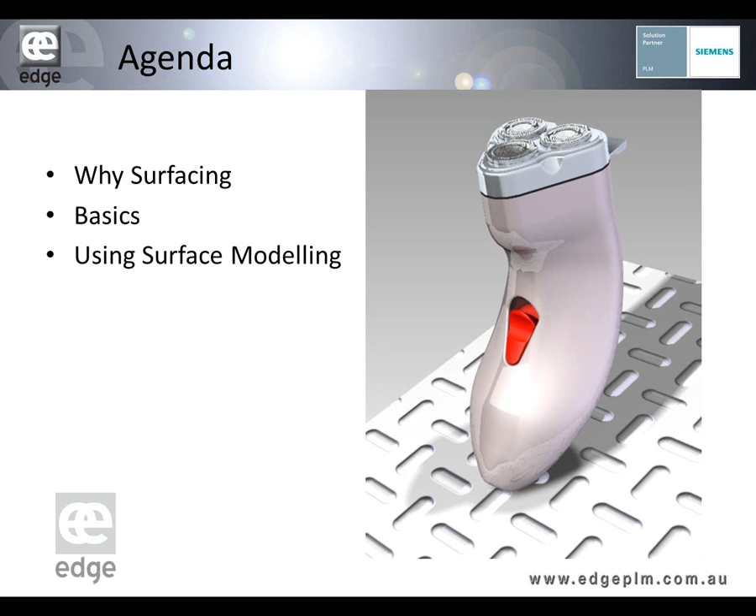Okay, just to divide it all up, it should be fairly clear cut, but it's not necessarily all the time. We're all familiar with solid models, and here function's the primary concern, and aesthetics are an afterthought, if at all. When we're talking about surfaced components, again, I refer to the shaver body here, aesthetics is the number one concern. How it looks, how it feels, all of those sorts of things are the primary concern, and function secondary.

Now we use surfaces again where function's primary, but using the surface technology happens to be the easiest way to go about it. And the example I've got here is like a concrete base, drainage base, or something like that. It's a series of planes, tilted planes, and the easiest way to produce those and manage them is to use surfaces. And we'll look at both of these techniques as we go through.

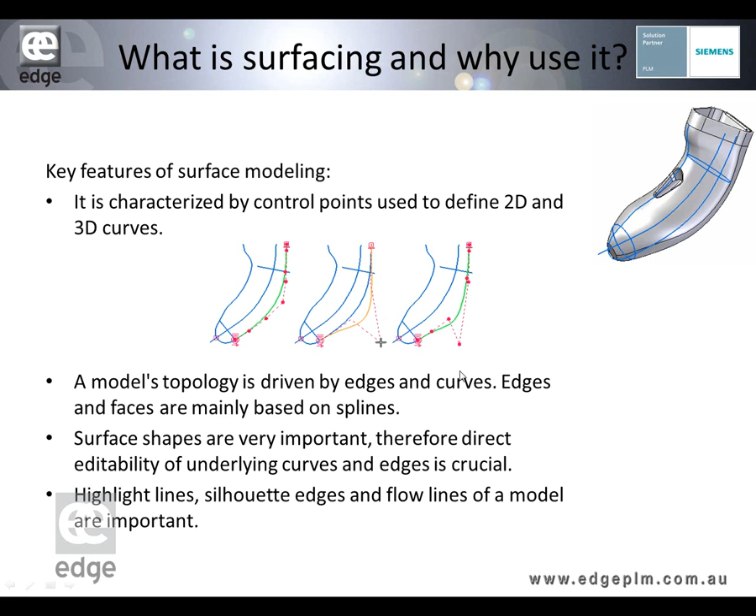When we're surfacing, we talk in terms of highlight lines and silhouettes and edges and flow lines, and these are what are important to make up the shape of the model. And that's what we use to make a shape. It sounds quite complex. It isn't. It's fairly straightforward. So we've talked a lot about curves. What are curves? So we've got the curves that we're used to, 2D lines, arcs, conics, etc. So straight lines, circles, arcs, ellipses, and so on. These are curves.

We also have edges of three-dimensional shapes, so cubes, spheres, cylinders, tori, which is the plural of torus, and cones. All of these things have edges, or silhouette edges, which we can use to drive models. The spline area we mentioned a little earlier is where we have continuously changing curves, and we have a number of tools to create and edit those.

And there's two types. We're looking at an example here of a 2D constructed spline, and we can have derived curves, which are derived from edges. So we might have a number of splines and edges. We also have 3D derived spline curves. An example here might be in this instance where I've got a curve that's been created between these two lines on the edge of a block. That's a 3D curve in space. There's been some points positioned on that, and then another curve generated through one of those points into the edges here, with controls on their tangencies at the ends. And that's a 3D derived spline curve.

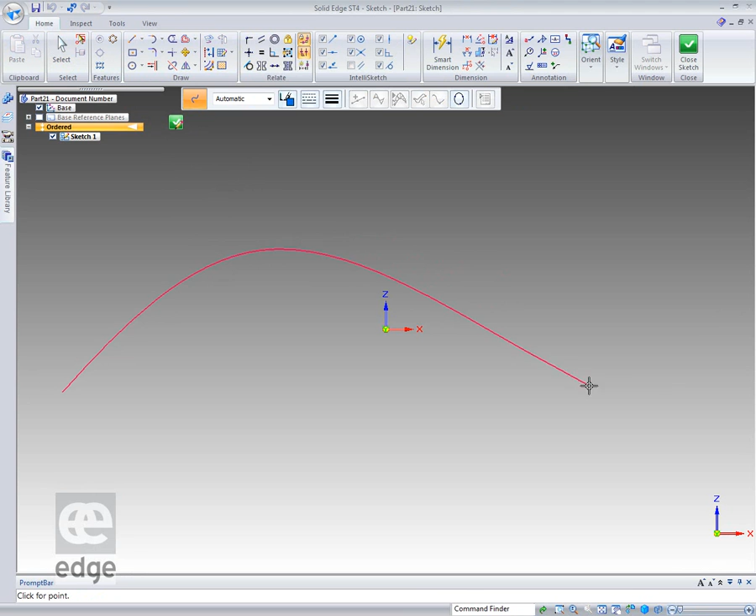Let's just look very briefly at how to create some of these, especially the 2D curves. So starting off, I'm going to use ordered for this, and I'll be using both ordered and synchronous today. The spline curve command is in behind the line command, and we simply click, click, click, click, click to place points. And you'll see the crosses that lie on the curve are the points.

If I reselect that curve, we will see a control polygon around the curve. And here are the points that we put in to begin with. They're the edit points. In between, usually between each edit point, the start point and the next edit point, we see 2 points on the control polygon. Now if we look at our command bar, we've got a number of things that we can use to edit this. To begin with, we've got a thing called local edit.

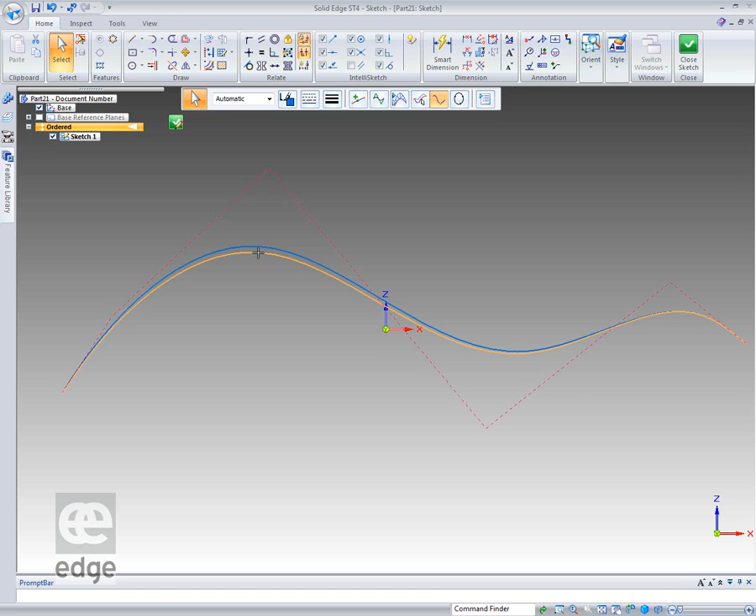Now what that does is if I change the position of, let's say, this control point, it affects the curve mainly locally, just around that edit point. It does tend to blend through the other edit points. But if I go to shape edit, the blending effect is more severe. It tries to keep the overall shape of the curve as I make the edit, changing the polygon control point.

Now the purpose of these polygon control points is that we can control the rate of change of the curve, if you like. For instance, I'm going to put a horizontal vertical constraint between that control point and the end point of the curve, so that the curve vector is vertical at the start point and then blends off into the rest of the curve. I might then want to give that more strength, raise it up, and then I might want this one to be flat, so I could have this effect.

Let's change that to local edit. See the effect there. I want that to be flat, so I'll put another horizontal vertical constraint from that control point to that control point. Now as I make changes in here, say to the edit point here, that condition's going to remain.

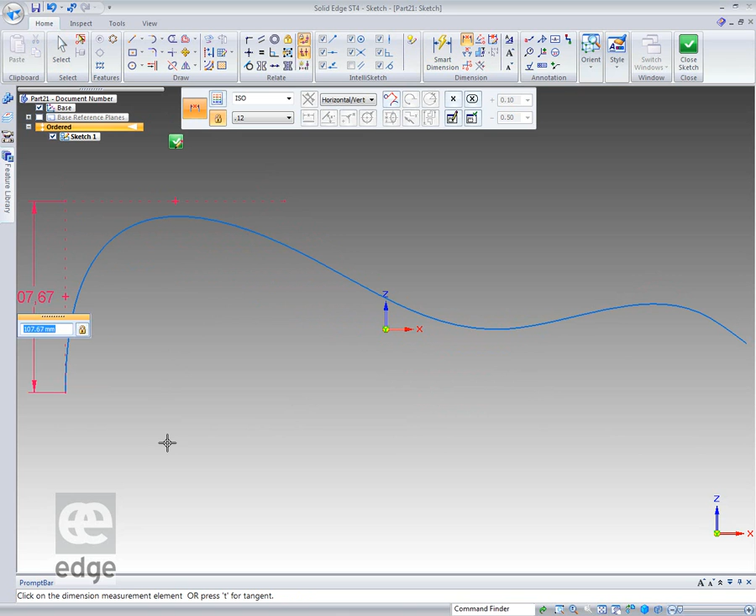I can place dimensions to these, so I could put a dimension from here to control that dimensionally. Likewise I could control the edit point dimensionally as well, from the edit point there to that base point there, in X and Y and so on. So you've got complete control over how these curves are created and edited.

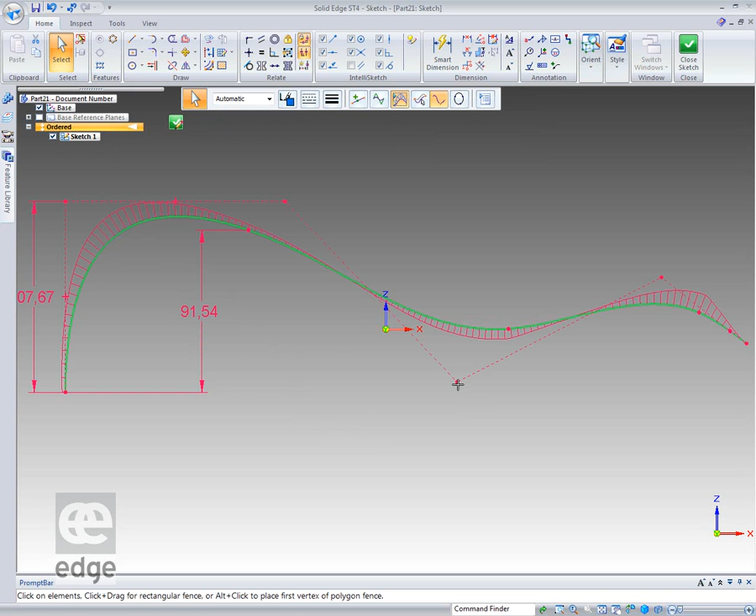A couple of other editing tools while we're here. We've got a thing called the curvature comb. The height of this comb shows the effect of change. So as I put more change in, we'll do a local edit here. We'll see that control curve get bigger. I need to get rid of these dimensions to give me more control.

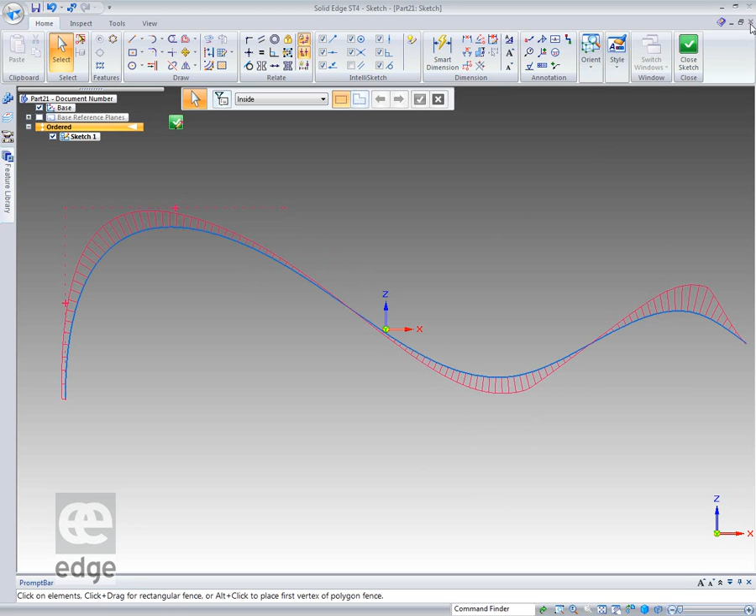So as I change this, you'll see that comb grow. And we also see inflection points as well. At the point where the curvature comb crosses over, we've got zero curvature at that point, but perfect blends through those. Okay. Just to give you a brief idea on how splines work.

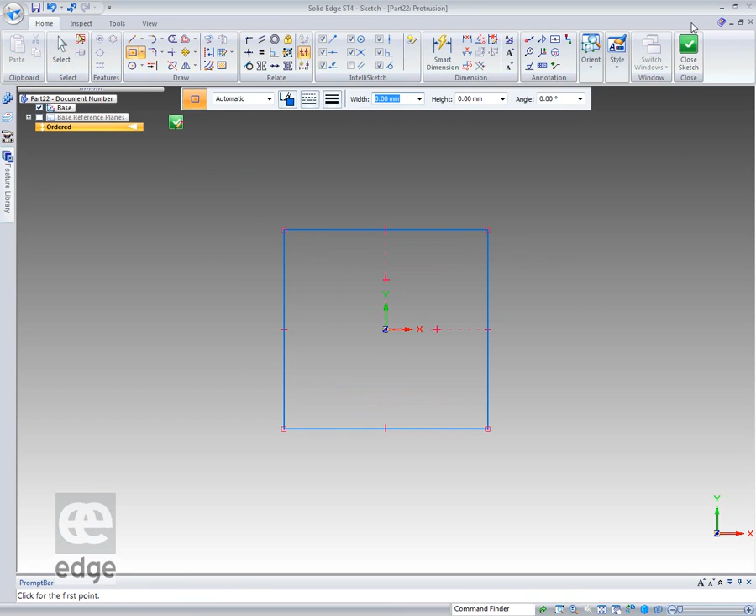I was talking before about the derived three-dimensional curves, and I'll show you one of those very briefly. So we're just going to create a rectangle here. Let's make some sort of shape. Okay, so I'm now going to use a key point curve from my surfacing set.

I'm going to say I want to go from the end of there to somewhere straight above the center there, right about there, to the end of here, to that vertex. And I want to edit the end points, so I want to change the end conditions, and the end condition I want for the start end is tangent, and tangent for that one as well.

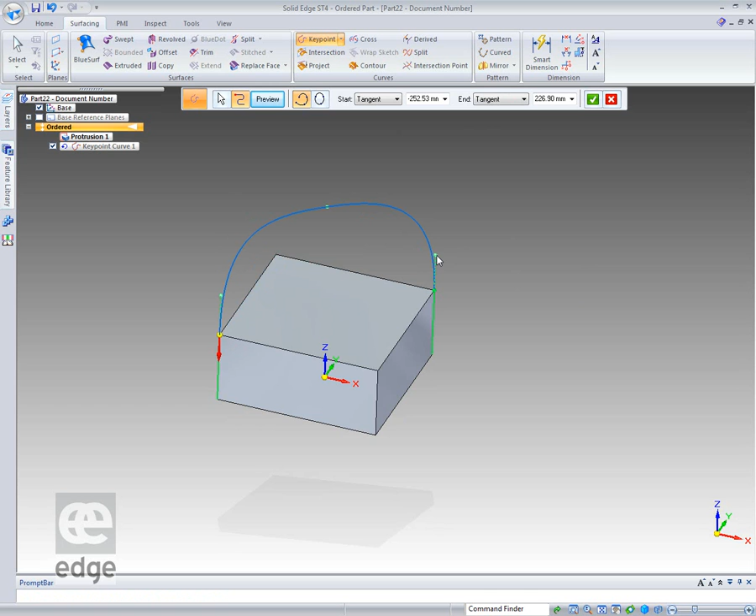We notice that the tangency here is reversed, facing this way, so I just pull on the tangency dot, and you can see the length of the tangency, say 252 roughly, and make the other end roughly 250 as well. So what we're doing is controlling that tangency through there. So that's a three-dimensional derived curve.

We can finish that. That was a point in space I used up here. We can dynamically edit that. I can pick up that point and move it. That point might be defined by something else.

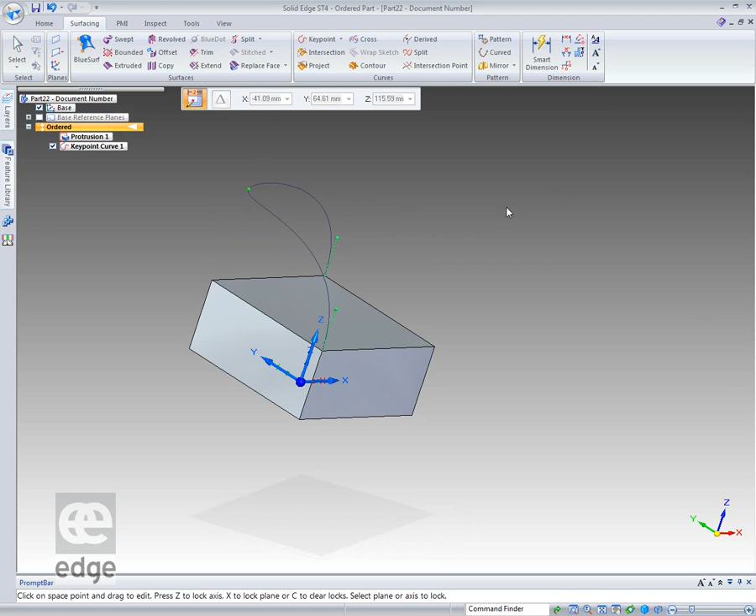I could put that point on here and so on, but that could be a point defined on a plane in space. So you can see how we've got that complex curve there. That's a derived spline. We use a function called key point curve to generate that. There's a number of other curve functions here that I'm not going to go into today, but are covered in the help and in the full training material.

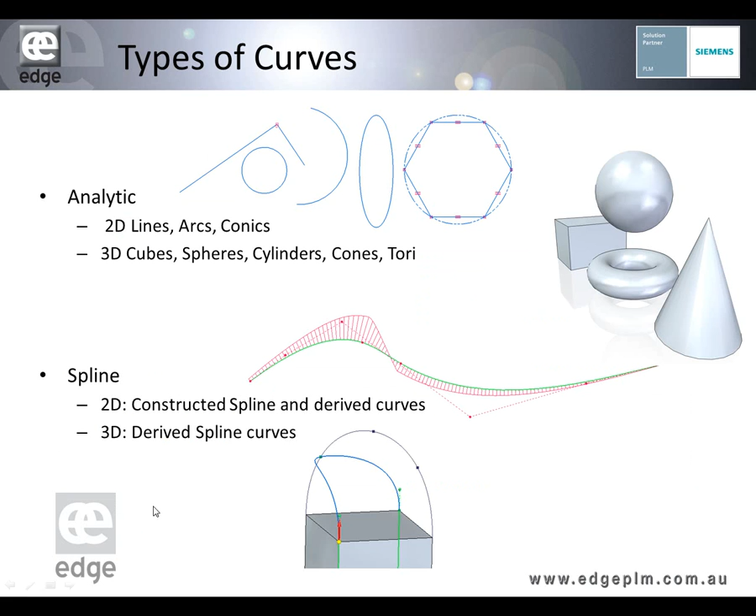Okay, types of surfaces. We've talked about curves. The curves are used to create surfaces. We've got bounded surfaces, and bounded surfaces are planes that are created between curves. They can be curved, of course, because they can be tangent to adjacent faces. We've got extruded. Here's just a sketch. We've extruded that downwards to create a surface. And we've got, finally, BlueSurf, which I'll use a bit later on. But a BlueSurf is a complex surface that's highly editable.

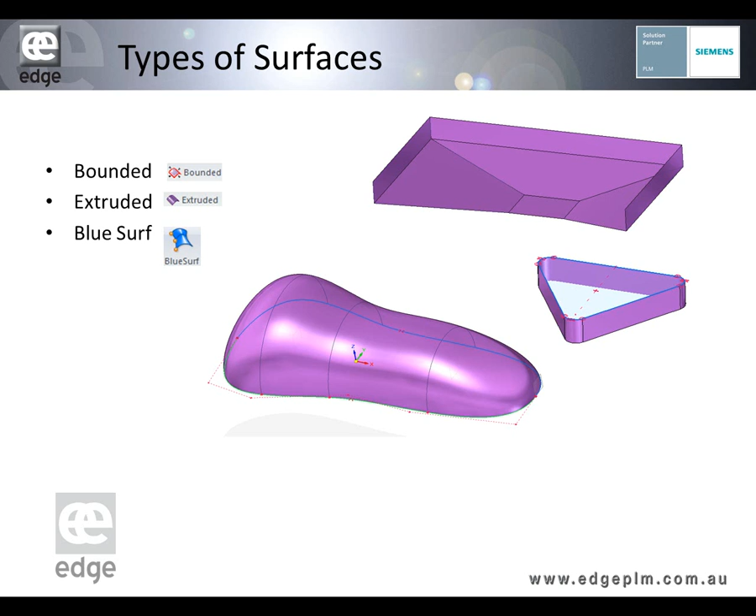There's two functions that are unique in Solid Edge surfacing. It's the BlueSurf and the BlueDot. These allow history-free flexible editing of sets of curves, families of curves that are joined together, and the surfaces resulting from those. And we'll see that in a practical example shortly. So it's probably now time to get onto an exercise.

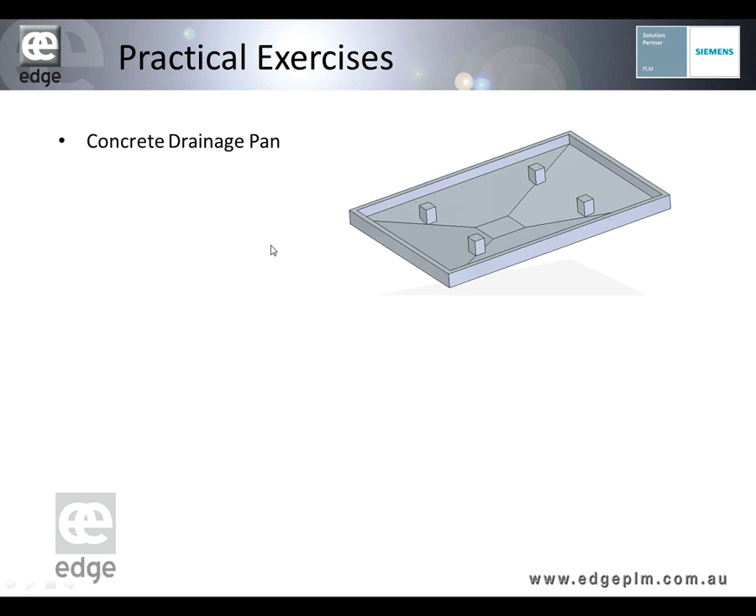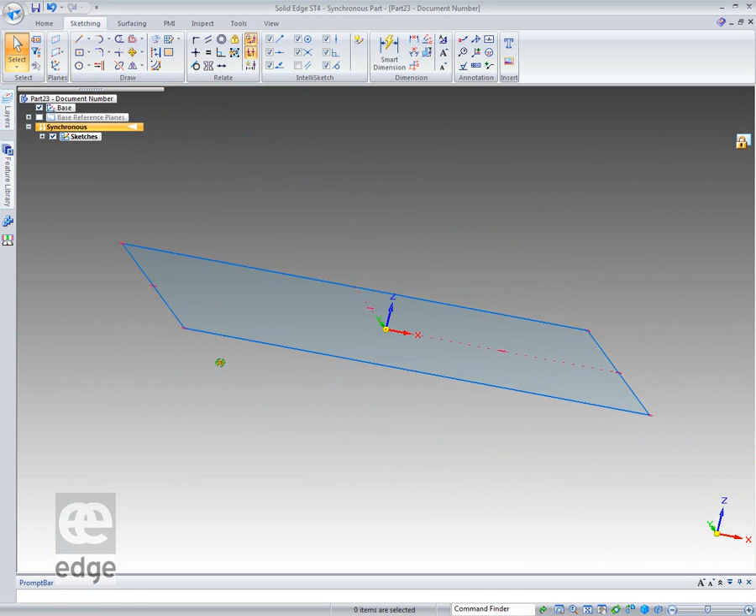So let's go back to Solid Edge and take a look. The first thing I'm going to do is I'm going to model this concrete base. I'm going to do this in synchronous with surfaces. So here we go. First thing's just to draw on a plane, select a plane, and draw a rectangle. I'm not particularly worried about sizes here. The exercise is not one about drawing, it's about surfacing.

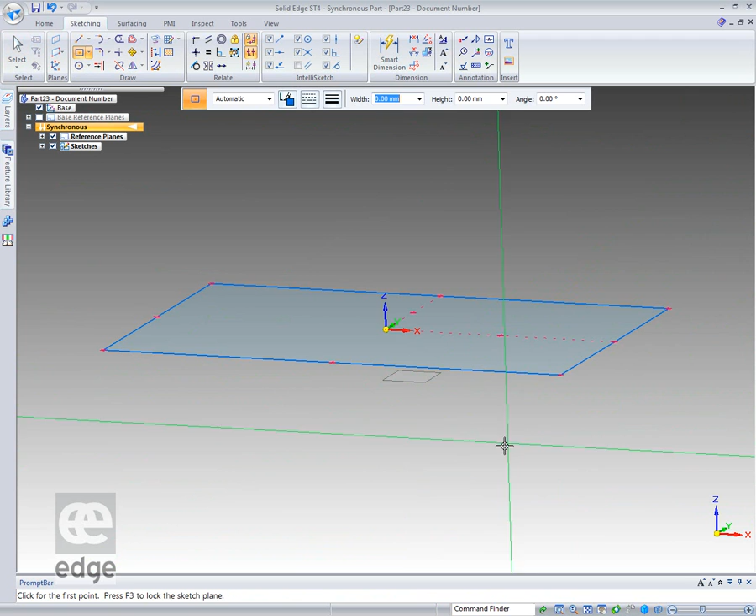I'm going to create a plane on there, and I want that plane to be, use the steering wheel to move that down 20-30 millimeters below. Okay, so I want to draw a rectangle on that plane. So I need to unlock from where I am, go onto the plane. I'll just use the F3 function to lock onto that plane. I can use the sketch view or Control H to get onto the plane, and I'm simply going to draw another rectangle in here. Okay, I'm starting to build up a bit of a shape. It might become apparent to you shortly.

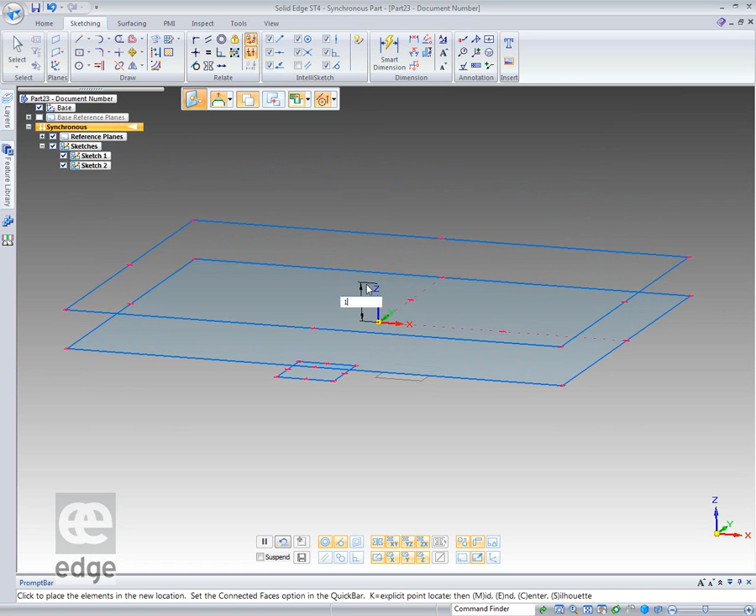Now I want to make a copy of this outside sketch for the top edge of the tray-like structure I'm generating. So wait for my dots, pick up my sketch. I'm going to move that sketch up, make a copy of it, of course, make it up say 15 millimeters. Okay, so I've got my sketch in place. I'm now going to use my key point curve.

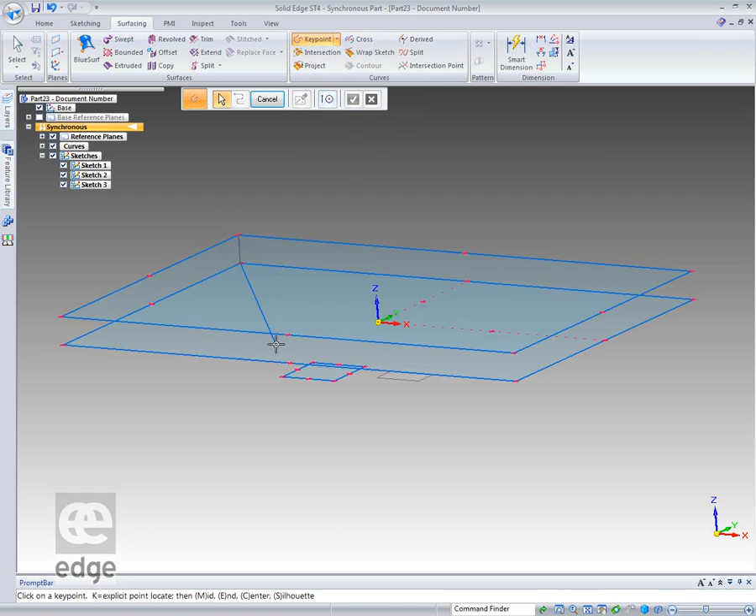Now if I draw a key point curve between 2 points, it will create a straight line. It's in 3D, so I'm taking from that point to that end point, right click to create the curve, right click to start a new curve from that point down to that point there, right click to create the curve, and so on. So pretty simple. Join the dots, just wait for the end point to come up on each one. End point there, take that end point to that end point, and I'm just right clicking instead of clicking the green tick. I want the end point there. Just escape. Went back too far.

Do what I say. Don't do what I do. Isn't that how that works?

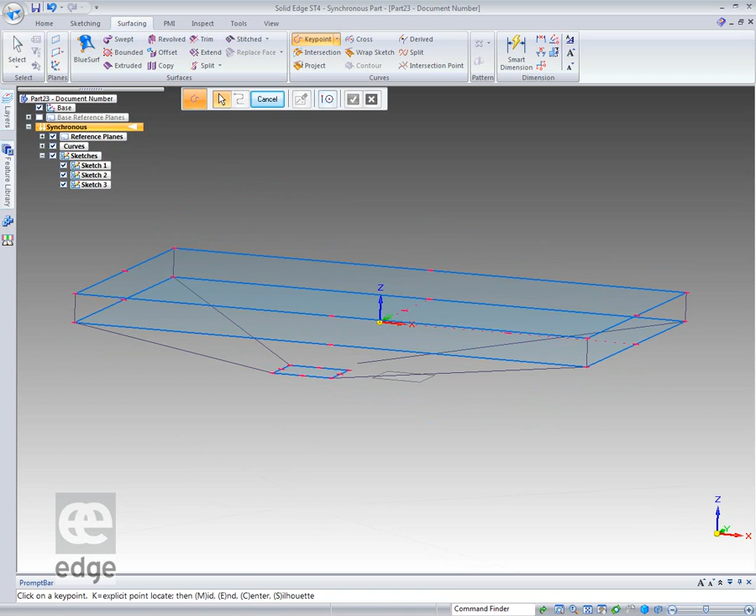And one more. Okay, so we've got a little wireframe in there, and I got that one wrong, didn't I? So just replace that one. Just have a quick check of your object as you create it to make sure you've created it correctly. Not try to rush like I do. Okay, there we go. So I've got a little wireframe of the shape that I want to produce. So this is pretty straightforward.

I'm just going to now use the bounded surfaces in here and pick the edges and tick it off. I missed an edge in here, that edge, so I've got a closed loop. Preview, finish. So it's just a plain face that I've created in there. So same thing again, just go around the edges.

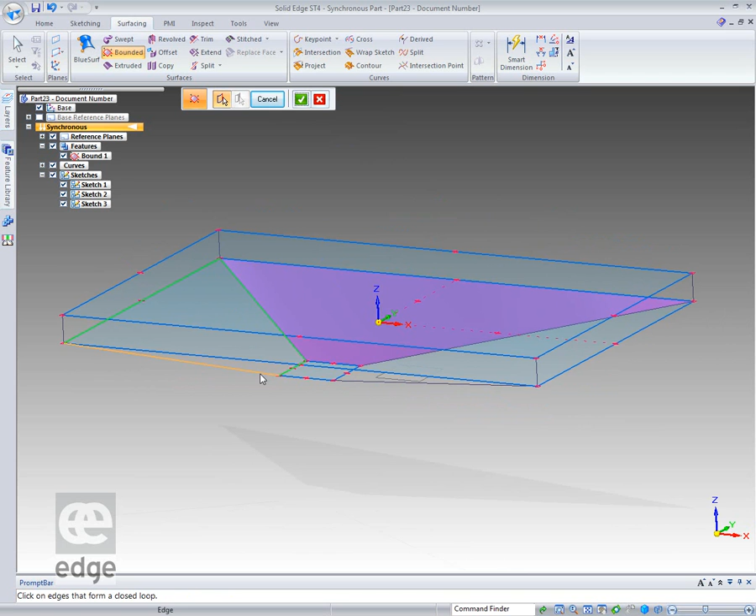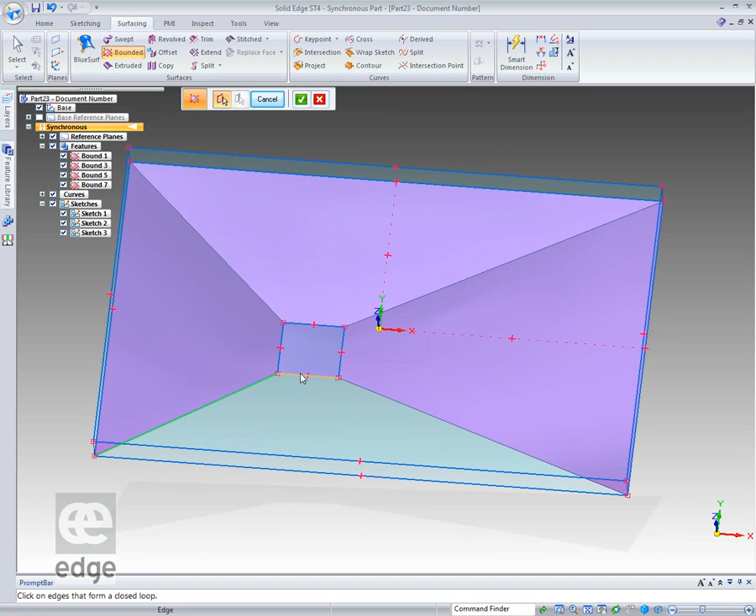It's not rocket science, let me tell you. It may seem a little laborious, it's really not. Putting the one on the bottom there, I can right click instead of green. Right click again, pick up this one. So it's just a matter of picking the edges there. Right click, and now we're ready to do these bits around the edge here.

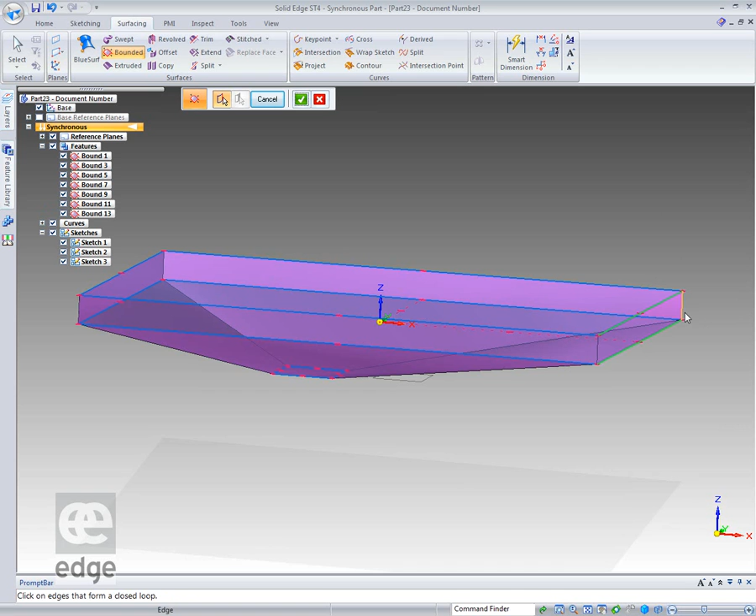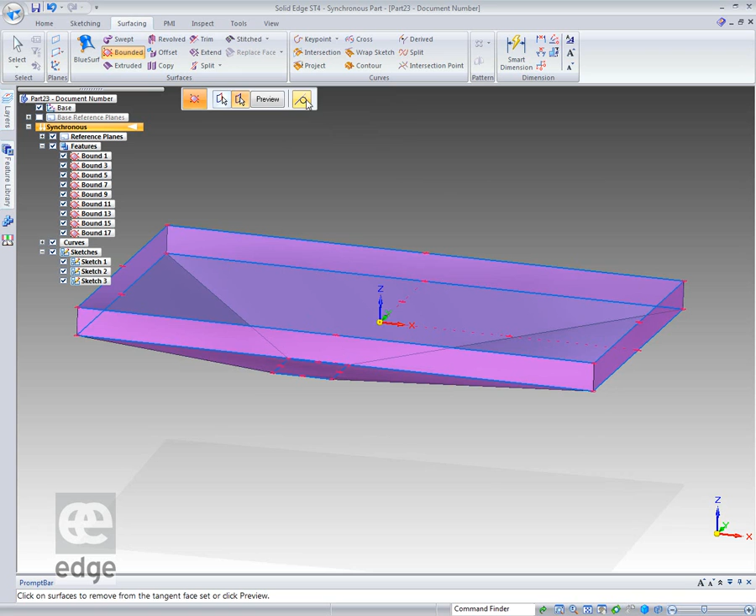And one more. What I'm doing here is actually producing a set of boundaries, if you like, that will define how the solid model ultimately will go together. Now the thing we need to keep in mind while we're modeling with surfaces in Solid Edge is it does use the Parasolid surface kernel to build these, so that we know that the surfaces that we're going to create are manifold. So when I click edges that are on top of the edges, they will in fact join and they will make a solid. So all I need to do now is stitch all that together.

So I use my stitch command here, which says I'm just going to stitch the surfaces together, just accept the defaults and finish. Now I've got this stitch here, and seeing I'm synchronous, all I have to do is attach that model, and you want to add them together. And what that's done is created a solid model. Well, that's fine. The stuff that I don't need here, just turn off those bits and pieces.

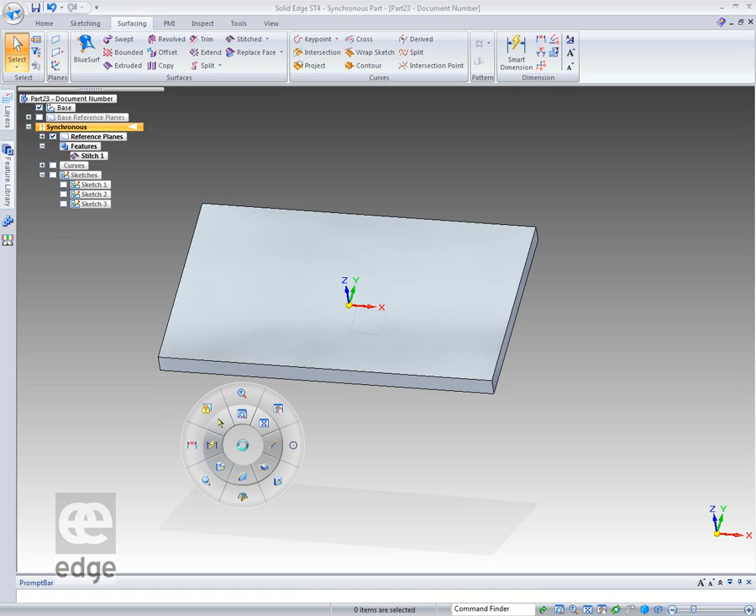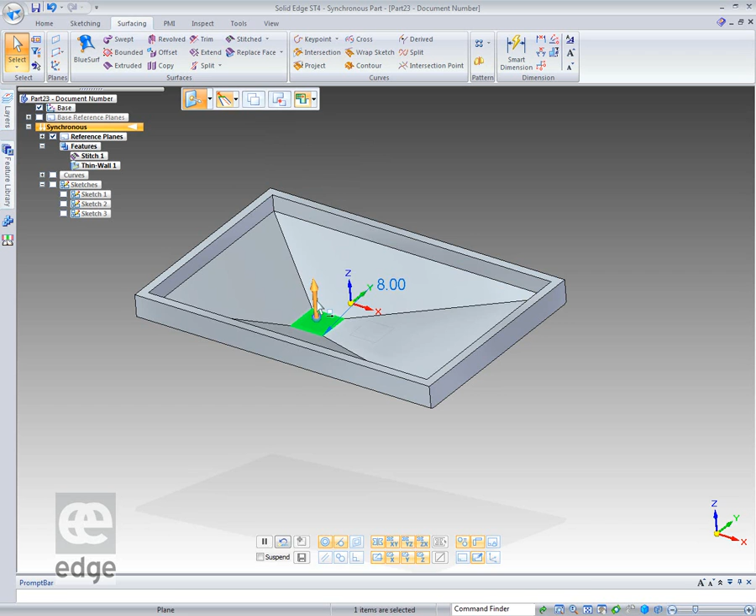Now what we're going to do is we're going to use the thin wall command, 8mm, but I want to come outwards, so I just click on the arrow to go the other way, and I'm going to remove that face. There we go. So there's my piece of concrete. And because it's synchronous, I can modify it. Because it's a thin wall, as I bring that up, I want to tip the edges. So let's drive that up there somewhere, put a dimension on it to drive it, whatever we need to do.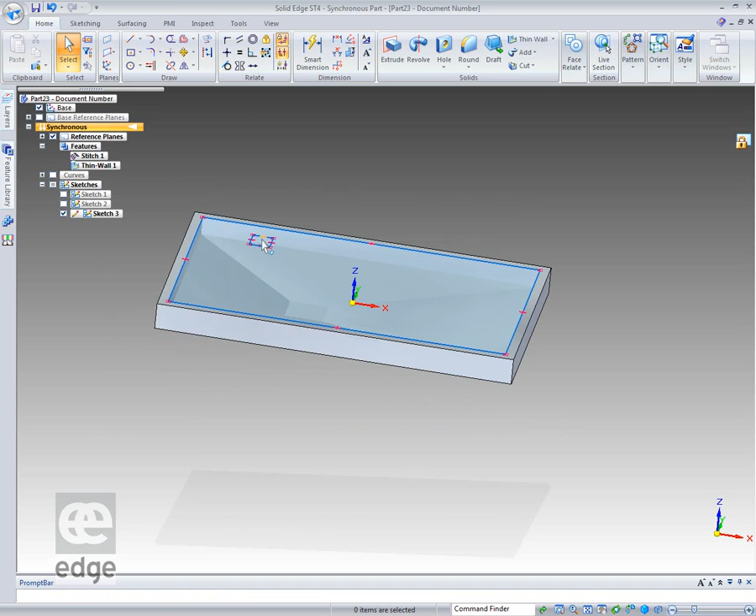And of course, if we're wanting to create objects in here, we can do that quite obviously. Wait for the dots. What do I want? I want the region. I want that to go through next. So just take it down to the next, and it fits in there. If I wanted to, and this is the power of synchronous now, make other copies of that, it's pretty straightforward.

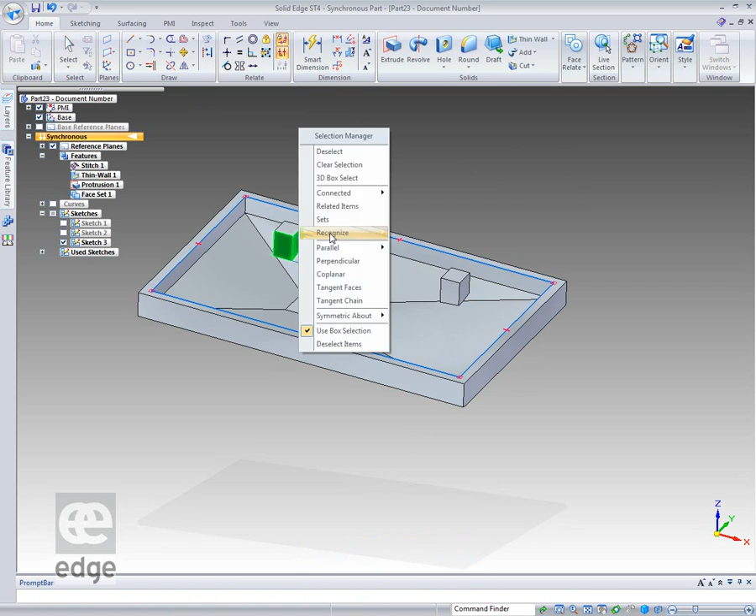I recognize that. I want to recognize a rib boss. Alright. Set the action to copy, make a copy of that across here, wherever that needs to go. You notice it reshapes to get the original shape. I might want to do both of those now. So again, I can use the tools to select them. And we want to move those, copy those of course, and copy them across here.

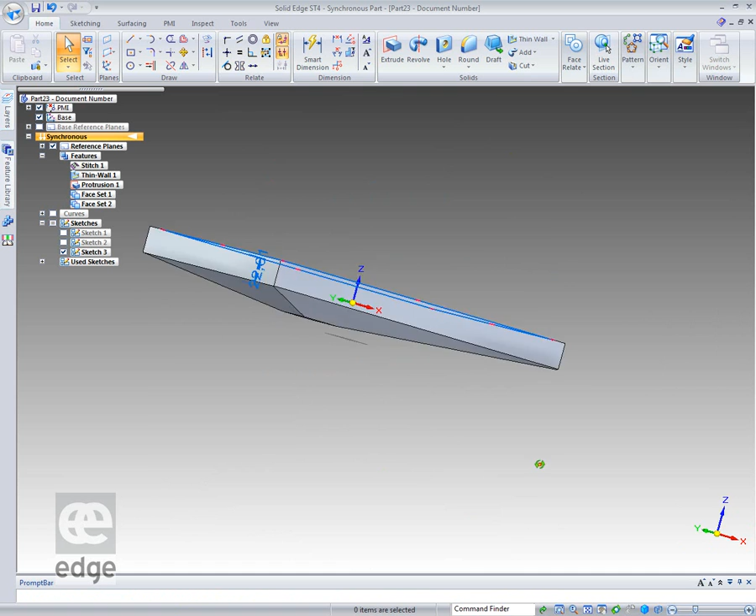So as you can see, it's a solid built from surfaces, but it allows us to very easily modify because it's a synchronous model.

Okay, moving right along. The next one that we're going to have a look at is, as I said, this shaver body. Now this is more complex, and this is going to be driven from edge curves that define the shape. So there's a number of curves that we've got to develop. There's some 2D sketches that I've already put in place so that I don't have to reinvent the wheel, as it were. So here we go. Let's just open up what I've done ahead of time. And the first thing that I need to do is to just make sure I've got my little cheat sheet to remember what I'm doing.

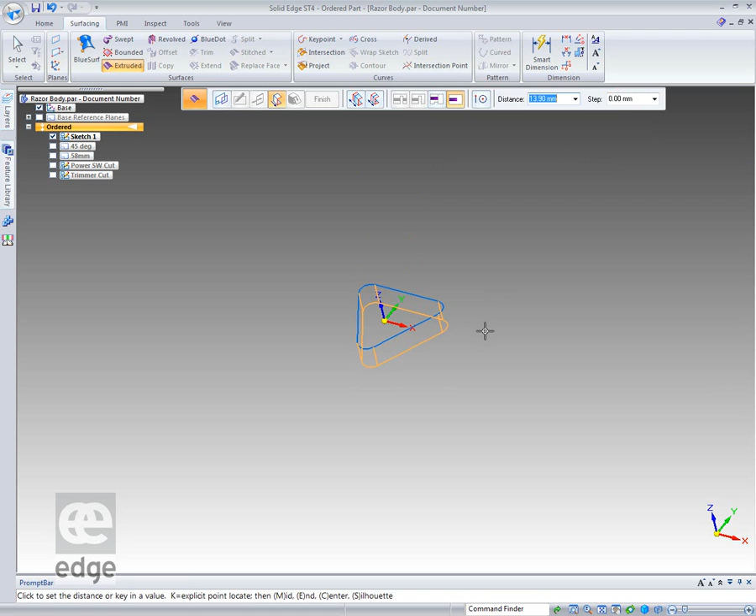And I'm going to make an extruded surface off this sketch here. So an extruded surface is just I'm selecting it from the sketch, accept it. How deep do I want it to go? 12 millimeters in this case. And click. What that gives me is a surface, and a surface, as you are aware, is an ultimately thin object. They're like planes in a way. So I've got that surface shape there.

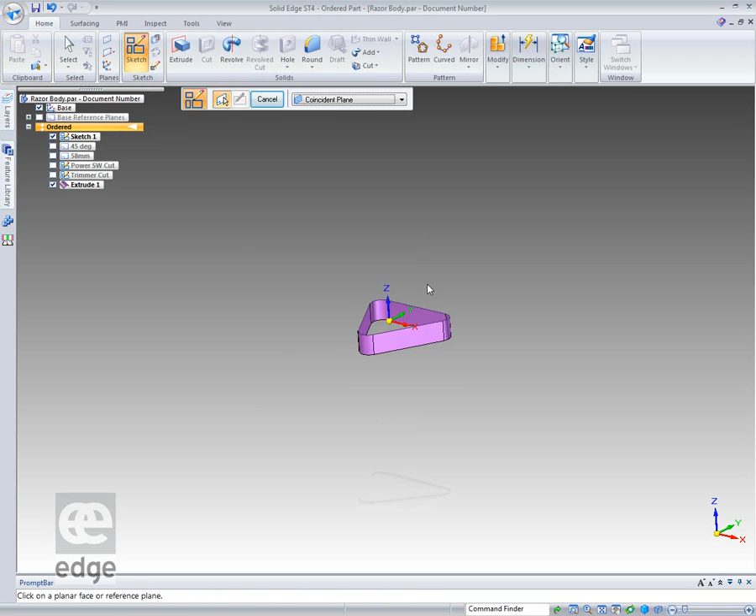Now I need to sketch on the right side, and what I'm going to do here is I'm going to produce a curve and a straight line that will create a tangent arc here. Started off from the end of there, come down to here somewhere, and I want a little straight segment on the end of that.

Okay, let's put some dimensions on this to drive it all. That needs to be 25. Okay, there we go. This needs to be tangent. I thought I'd done that, but I hadn't quite, so make that tangent to there. That's good. And then we need a couple of dimensions to drive this.

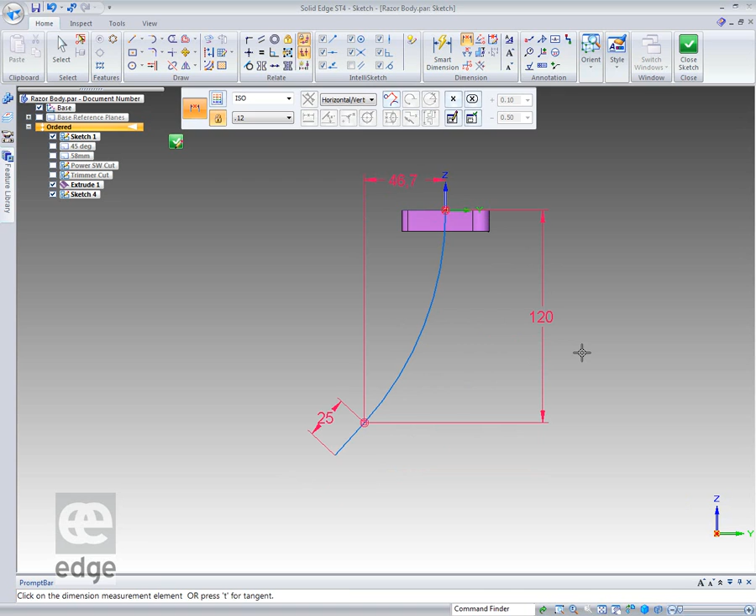So I'm going to dimension from there to the end of the arc this way, and there, and another one from there down to here. That needs to be 120. This is pretty straightforward. We know about this, and we need to be, say, 56. Okay.

Now the bottom shape of this is going to be an ellipse at the end of this curve. So I want to put a plane that's normal to the curve, at right angle to the curve down the end there, right there. And we want to sketch on that plane.

When I'm sketching here, I'm just going to turn it off a little bit so you can see that end of the straight line, and I want to put an ellipse on here by the center point. Now notice that glyph that comes up, that's called the pierce point. That's where that curve pierces the plane, and it needs to be 18 by 15 by 0.

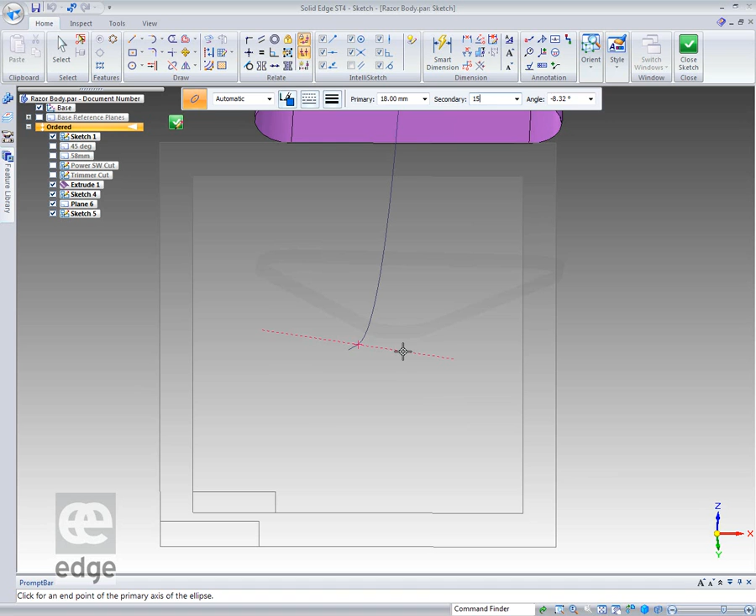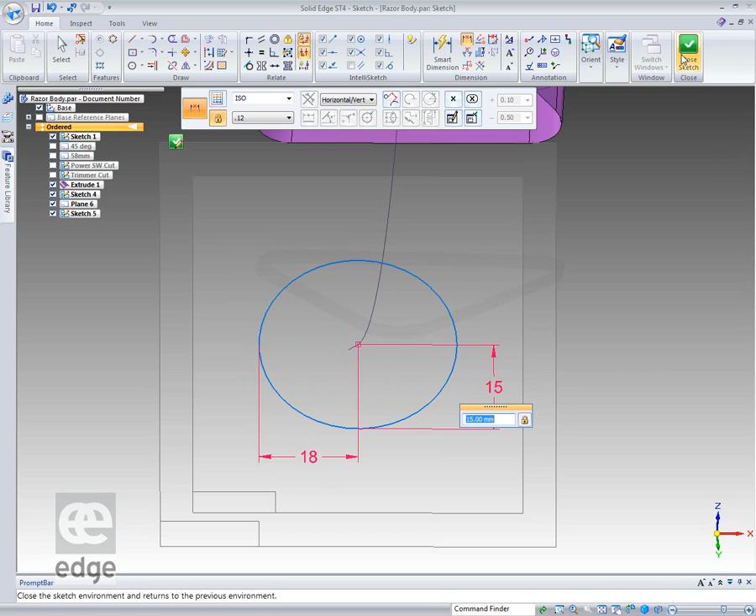And there we go. If you want to put the dimensions on it, by all means we can. Here's a dimensioning tool. Find the correct point. There it is. 15. Okay, close the sketch.

I will turn off the plane that I used for that because it's only confusing. So we've got that curve in there. Now we need to start generating some additional curves, and these are the 3D curves that we're going to be using to generate this part.

So let's fit that, and I'm going to use my curve tool. There we go. I'm going to start from the pierce point there, where that surface pierces with the plane that I'm drawing on, and come down a little bit and create some curves. And the pierce point there. Right, so we've got that curve. I put another one in here, and it's a much simpler curve to there.

Now I'm going to zoom up into here a little bit and show you what I want to do. I'm going to take the first point of the control polygon, this point here, and make that horizontal vertical to this line. So it's constrained like that.

Over here I want to make sure that this curve is tangent to that edge or face, and then down the bottom here.

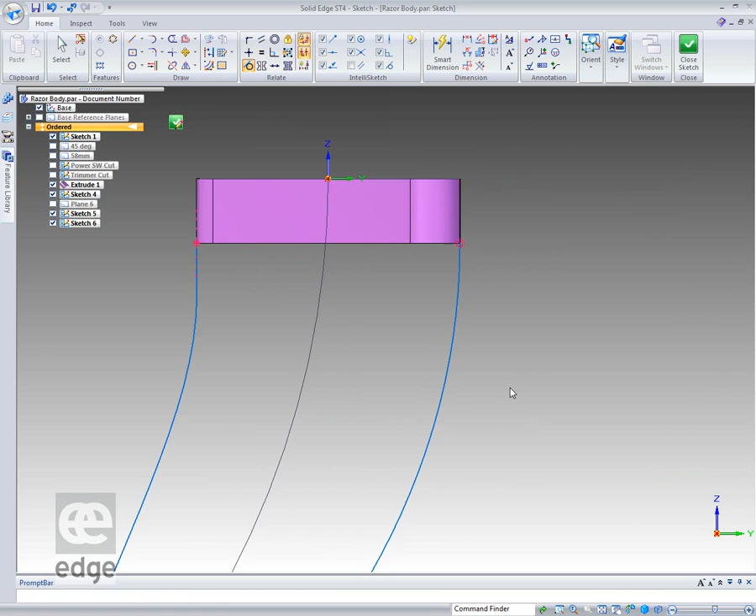Go back onto my drawing plane, we're going to draw some arcs, just arc by 3 points. So I'm going to go from the end of there to the midpoint on there and make that tangent. See the tangent point come up there? So that's tangent.

And I want to do the same thing here, from there to the midpoint on there and pull that round so it's tangent. And we'll make the two curves tangent to each other. So two arcs tangent to each other like so, and it doesn't want to do that for some reason. They're not connected, that's why.

Let me go back and connect those arcs. So I want to connect the end of the arc to the end of that arc and then make them tangent. This end gets cut off, so it doesn't really matter that much, but it does affect this shape. We saw that shape change in there.

I'll use my control polygon to not do that, to undo that. I will just take that tangency off there, that's alright. So let's shallow that curve out a little bit.

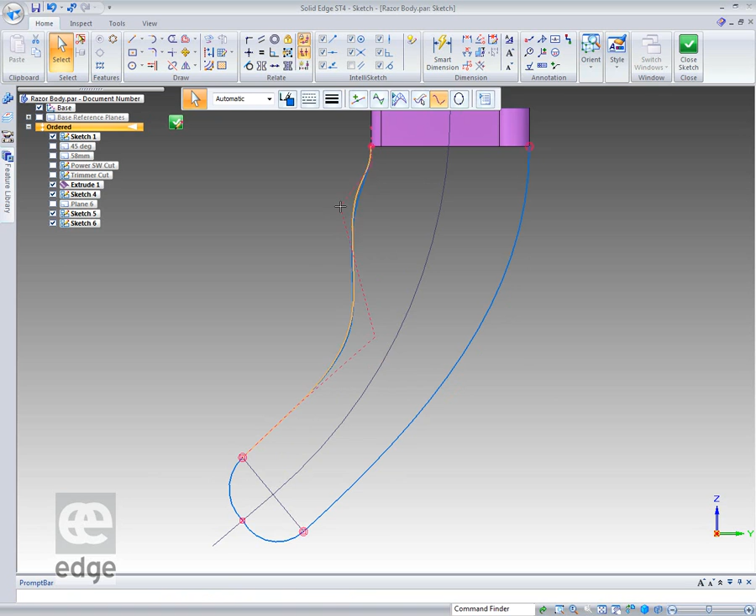This one here, now we want to modify that to put a thumb bump in here. That sounds a bit funny, but what I'm talking about is having a little bump shape for this. There's a switch goes in here, so I'm going to pull that out like so, push it in like so. So that's a bit exaggerated at the moment. We'll push that out a little bit like so, but we want to have that little pronounced bump in here, so I might pull that up to there. So we've got that little bump area in here, and that's pretty good for what I want at the moment. That's looking okay.

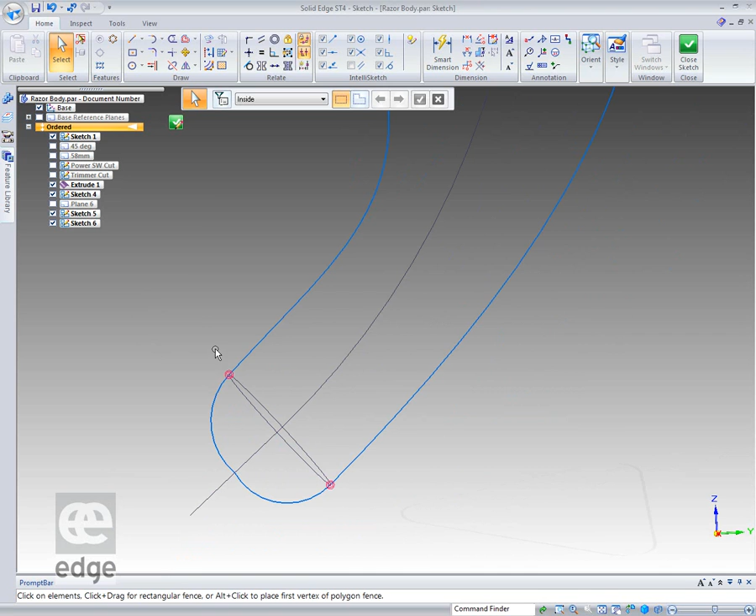Yep, I might actually fiddle with these curves a bit. Just take that point out and just connect those to each other and make them tangent. So the end of that to the end of that, and see if the tangency doesn't mess it up too much. No, that's better. Okay, that's fine. That'll do for what I want.

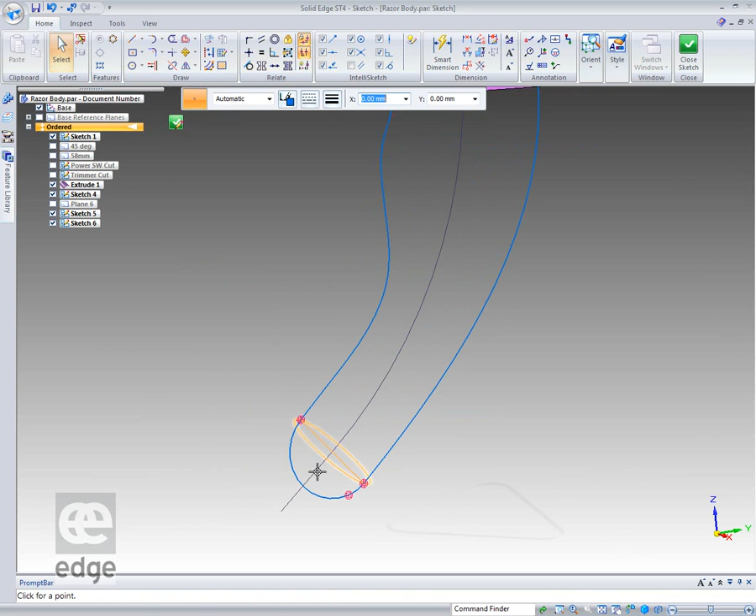I want to put a point on that curve for something else I'm going to do a bit later on, just on the intersection point of those two. It's a start point for the next object that I'm going to do.

So we've got our guide curves in there. They're fairly complicated, and we're going to use that point, this curve, and this triangular curve to create a BlueSurf, then use these as the guide edges. So let's go to surfacing and create a BlueSurf.

We'll start from there, go to there, and then to there. What you see is it's like a loft, taking those direct points. Now that's good, that's the cross section step. I want to go to the guide curve step.

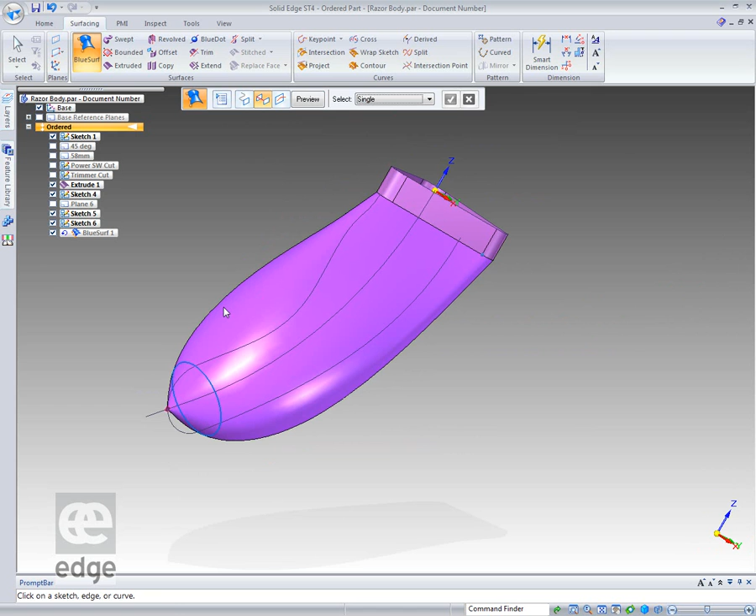I'm going to select single because I want to pick that curve and that curve, tick it off, and you see we've taken that shape in. Then we take this curve and this curve, and the curve didn't fit.

I've made a small error there, let me fix that. Let's see what I've done, go back to that sketch.

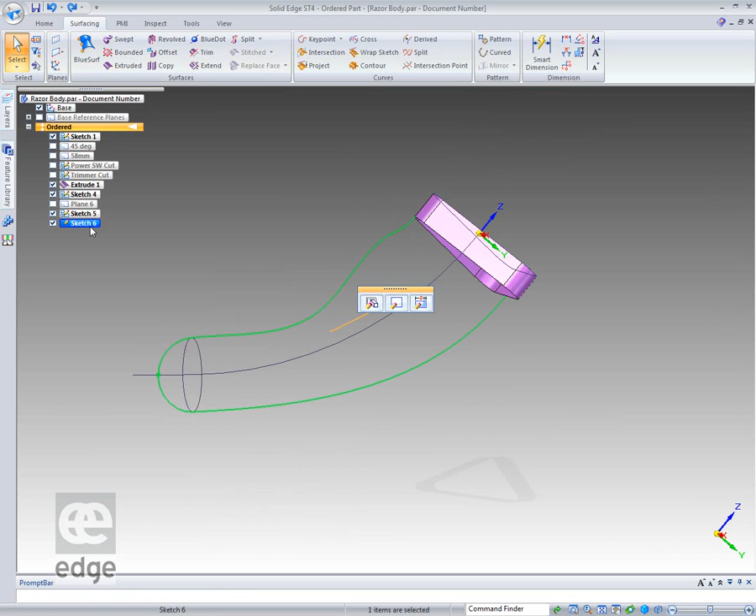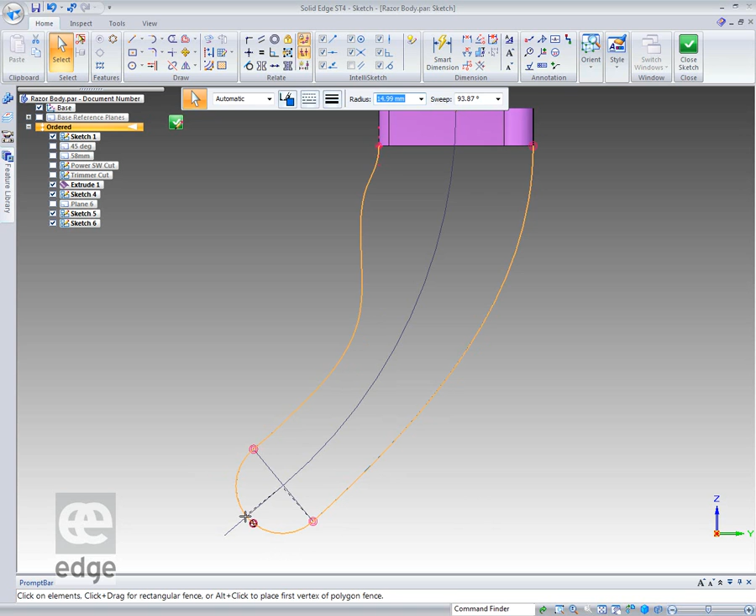Okay, that will probably do, take that off. Let me see if I can get that round a little bit further. I just want to put the center of that round onto there roughly. Okay, that's good, that will do for what I want to do.

Close the sketch. Let's go back to my BlueSurf. Right, so picking that point.

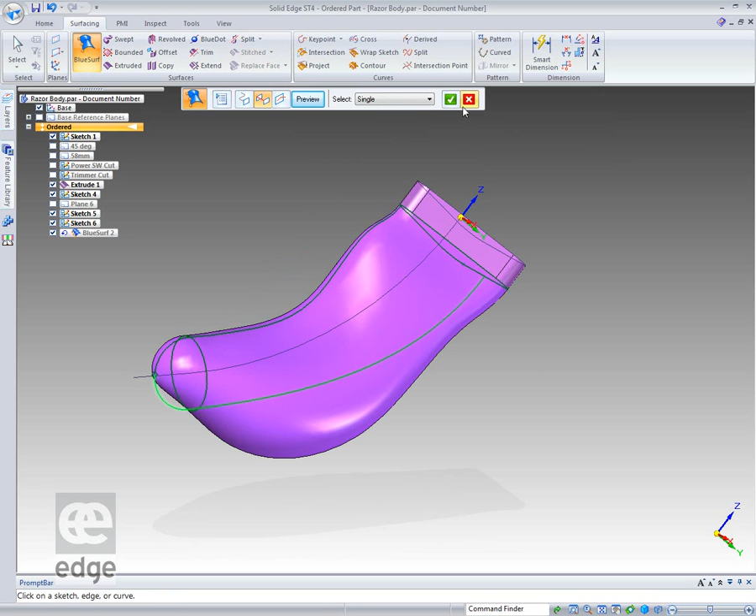That's better. Okay, next line, make sure we select single here because I just want to pick up that curve and that curve. Check it off, and then that curve and that curve to pull the other side in. Now we'll see we've got this quite nice shape.

Now the interesting thing is when we produce that shape, let's go one further. I'm going to close it off so we can produce a solid here just by closing this off.

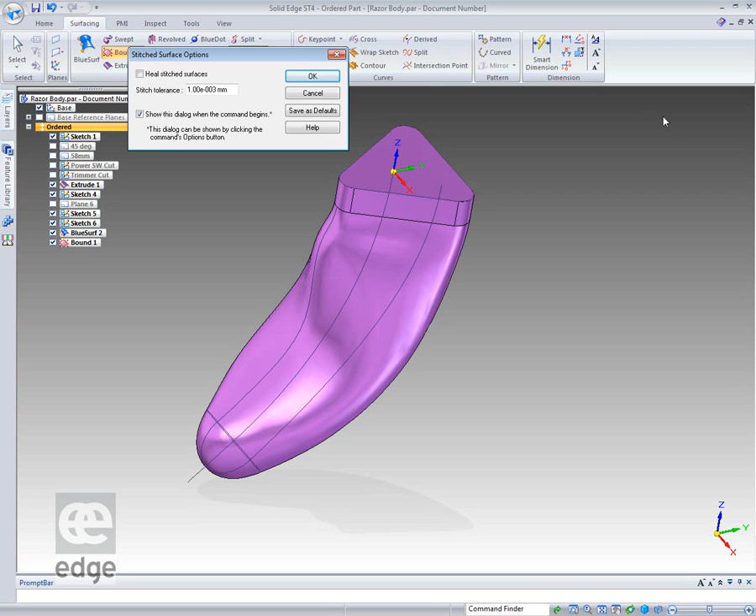Now when we stitch this, you'll see another option come up. Just select everything, and it says it's going to result in a solid body. Is that what you want? We say yes.

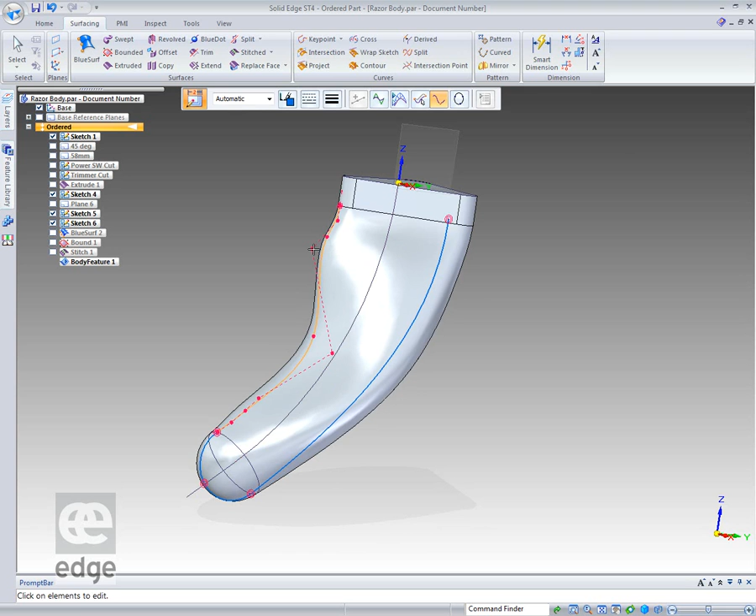Now if we edit this curve, come back here, dynamically edit the curve. Let's just change that point slightly. You see the model update in real time. So we've got a lot of control over how this is going to look.

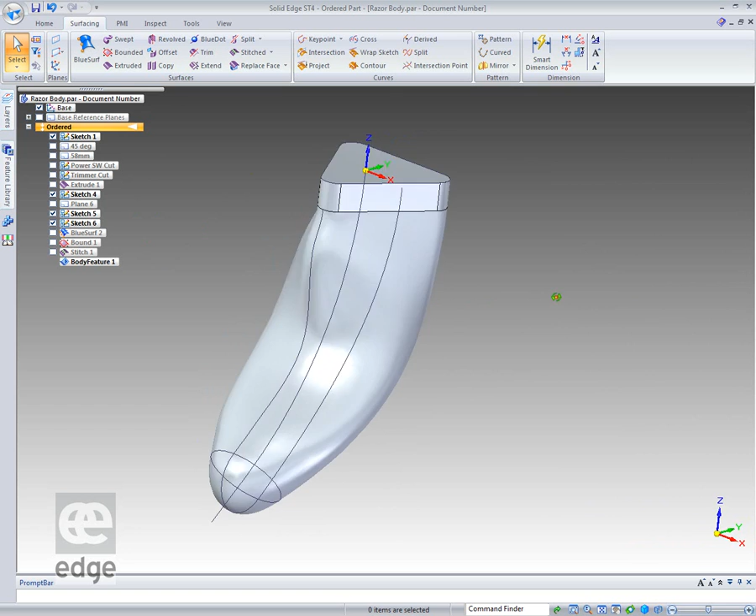With surfacing, it's what looks good is what's good. So we've got the outlines of our shaver body. We've got some cutouts we can do on this, but time prevents me from going too much further. You can see how we get this fairly complex shape out of some fairly simple curves very quickly. We could have defined other curves up the side here, mirrored those across, and had a great deal more control. So you can see that it's not a complex operation.

Finally, we'll do the last one. We're going to do an engine cover. Now this engine cover is going to be built in situ.

So we have an assembly. Go to a configuration here that I'd have for the engine cover, this one. I've partially modeled this. We've got a block in here, so I need to find that, and we're going to in-place edit or in-place activate to edit that.

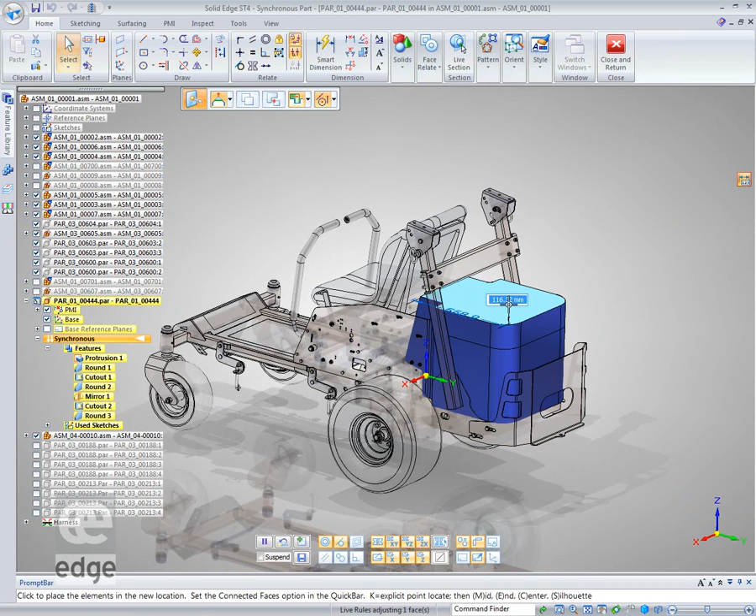First thing I'm going to do is just pull that up 100 millimeters. I've made it fit roughly in the shape, but it's nowhere near where we need it to be yet. But let's get rid of the rest of the model.

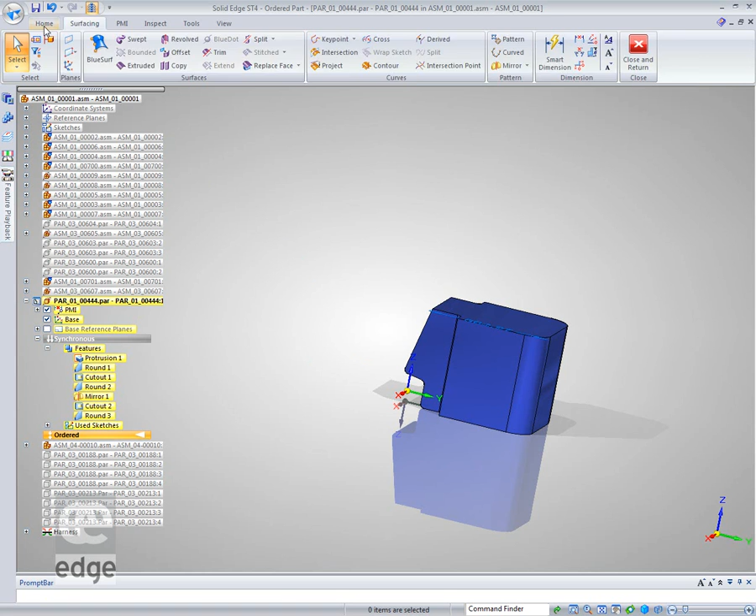We're going to sketch. I'm going to go to ordered, so I transition to ordered. Notice we've now got synchronous and ordered in the one part. So I want to sketch on that face, and I'm going to produce a curve.

Right, again as we've done before. We're doing this a couple of times now, so it's getting familiar. We're going to start off about here somewhere. I'm going to produce it off the top of this face here, like so, and ramp it right down here somewhere.

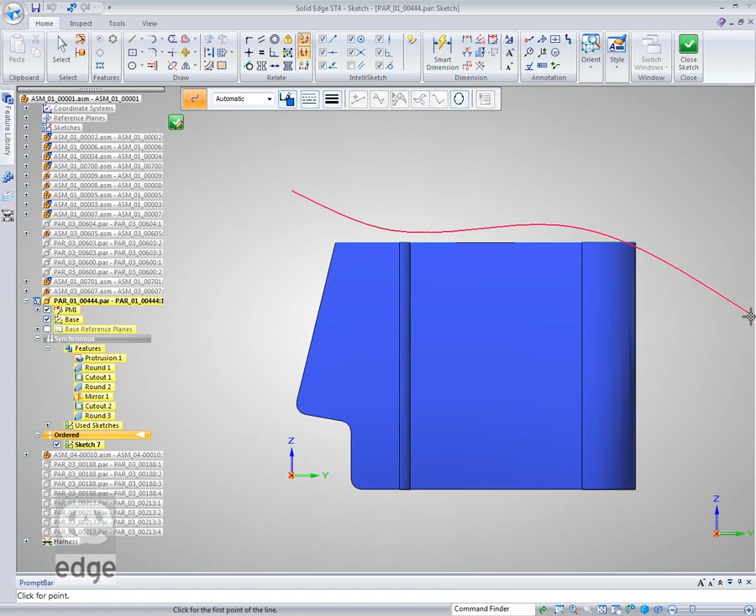Okay, running out of room, usually with me, so I need to edit that curve a little bit. It looks a bit ugly, so we'll pull that out with a bit more curvature in there, a bit longer. Yep, that's about roughly what I want. Now, that's fine, I want to put another curve on here now.

I'm just going to use an arc to produce it. So we're going to sketch again, but this time I want to be offset, so a parallel plane from the base coordinates here, back say 300 millimeters. Now in this case I'm going to just draw an arc by 3 points.

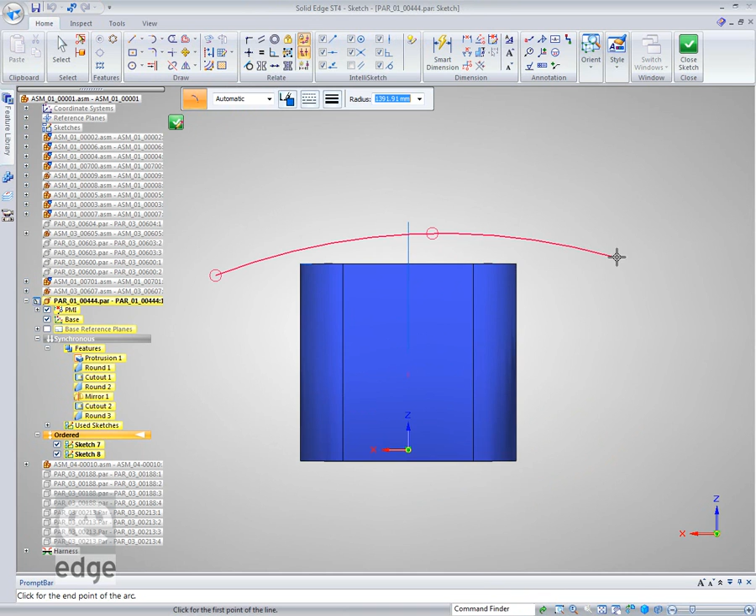Out here somewhere, just keep those two edges together. I want to join, just make sure it's centered, so I'll take the center of the arc and put it onto the plane there somewhere. That's fine. Now to create surfaces, our curves have to be joined.

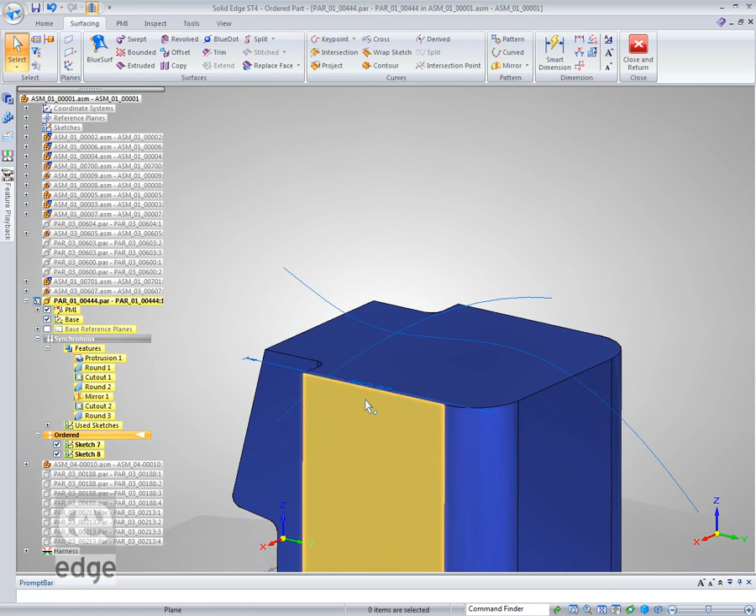If I look at this, you'll notice those curves don't touch, so I need to make them touch. We have a function unique to Solid Edge called BlueDot, which allows us to edit curves to put them together. One thing I forgot to do, which was the point of this, go back to that sketch, edit the profile of the sketch.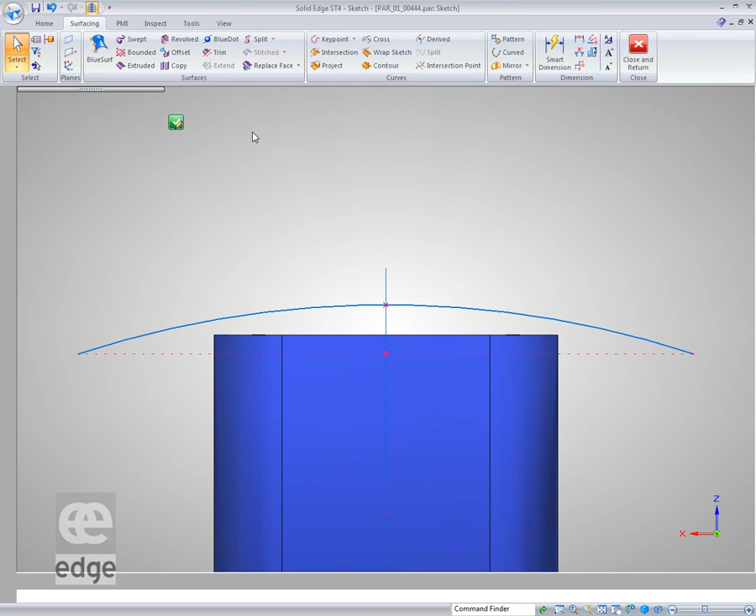One thing we need to do in the draw command is convert to curves. So I'm taking an analytic, which is an arc, and converting it to a spline. Click on that, you'll see it's a spline. I've got the control polygon around it.

Okay, now back to my blue dot. What I need to do is join this curve to this curve, with the least amount of movement. What it's put in there is a blue dot, which is an edit point between those two. It doesn't appear in the history, it's only to do with the curves.

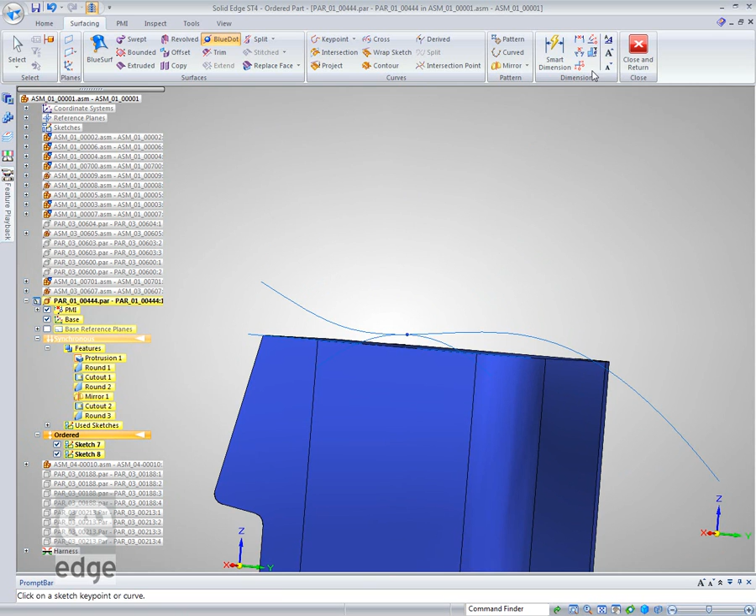So now we're ready to make a surface through here. We're going to use that curve, tick it off, and this is the cross curve, tick that off, and it produces a surface through there. Now I want to put that surface on the top face, so I use the replace face function, select the top face, tick that off, replace it with the surface, finish. So we've seen it create that surface now.

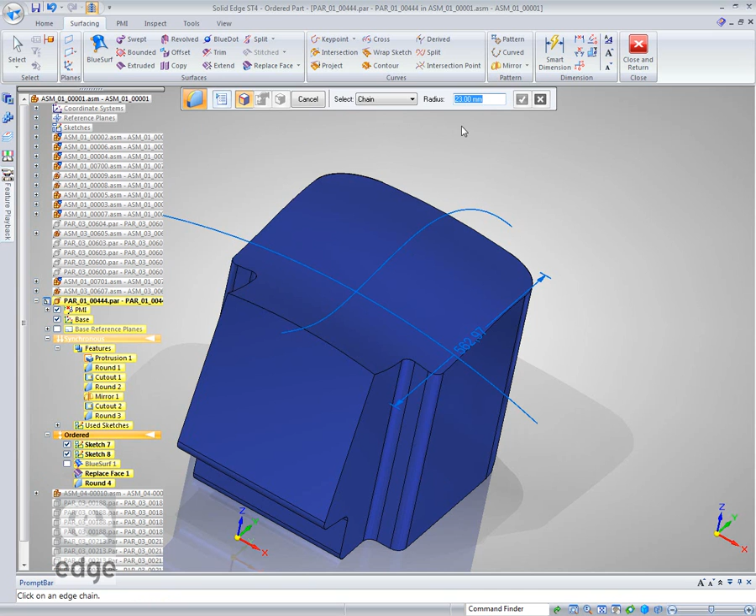Okay, we need to do just one or two things to clean this up a little bit. I want to put some rounds on very quickly, just on the corners here and here. Make them 23, I think is what I want. And then I want to put a round along this edge, make that 20.

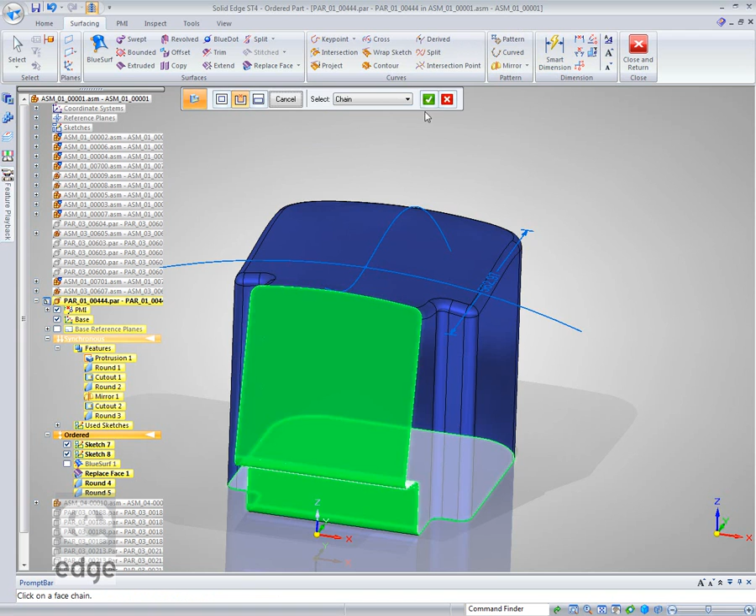Okay, so now we need to thin wall all of this. So I'm going to thin wall, common thickness is that. Pick the faces to remove those. Check it off, preview. And we've got a nice beginnings of a cover here.

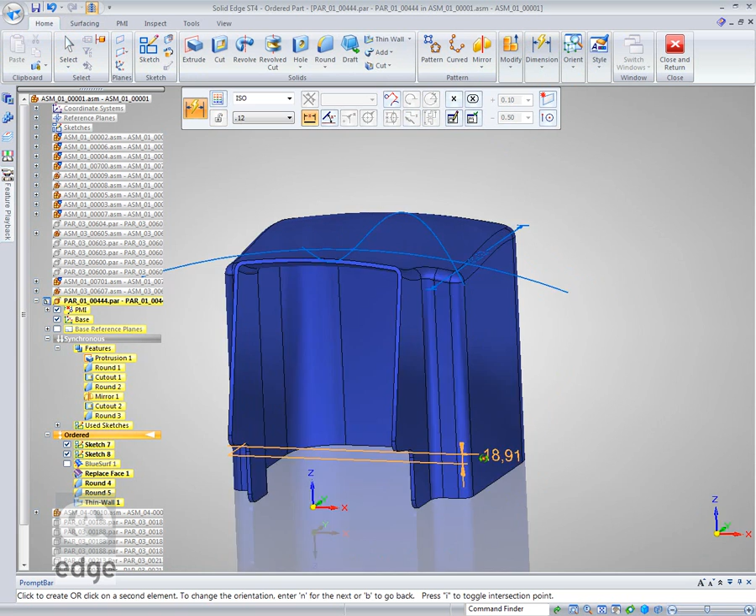Now I want to control this cover. Remember I'm in ordered, but I can just go straight to home, put a dimension from here to here, and wherever I want to put that, down there somewhere. And we need to modify that dimension, so you should be able to see that update on the screen. There we go, the webinar makes it a little slow.

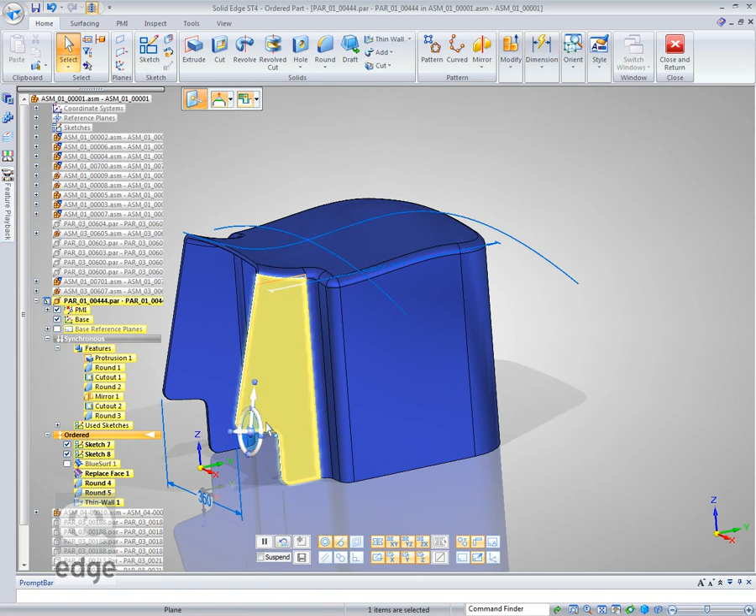I want to make that 350. So you can see that we've got all our synchronous editing commands right here. So we've got a hybrid mode where we've got both ordered and synchronous together, and if I roll that in, you can see I can change that in a synchronous manner. The surface informational updates, everything works as we'd expect.

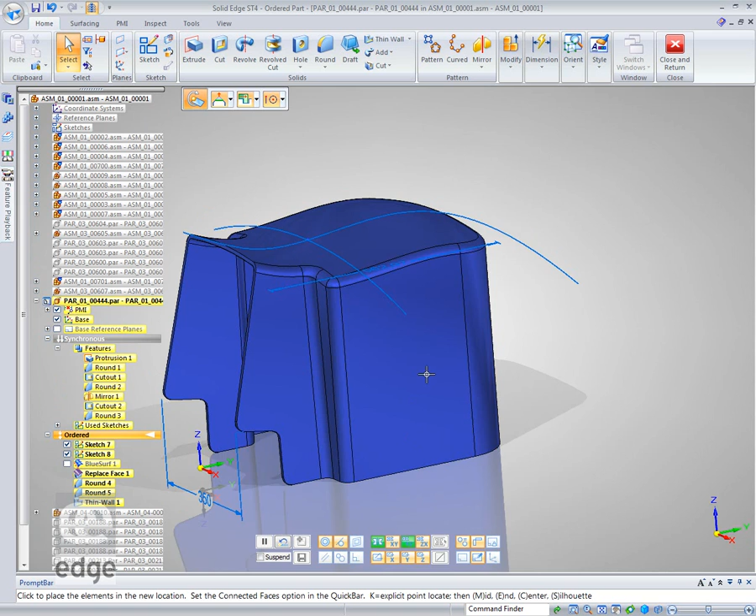I'll make that 2 degrees, and likewise with this one here I'll bring that in 2 degrees as well, so you can see the effect of that. Pull that into 2 degrees.

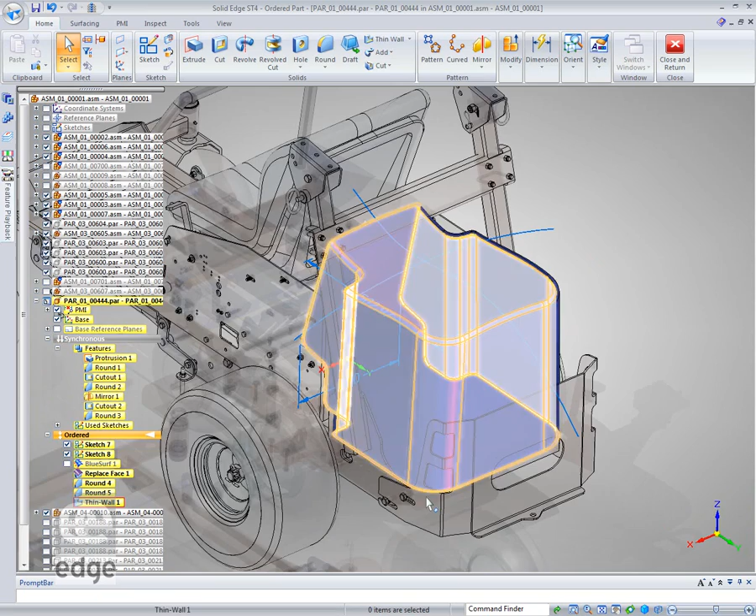Okay, let's show the rest of our assembly, and we're starting to get close to what we want here, but I need to be able to edit this a little bit. I want to change some shape in here a little bit, so I'm going to come in here.

And I'm going to pick up that blue dot, and I'm going to dynamically edit it, and a little gnomon comes up. Now this allows me to edit this. I can do a delta edit, an absolute edit. I can move along a vector, or I can restrict myself to a plane. I'm going to restrict myself to the center plane here, and I'm going to do a shape edit on both of these, so the overall shape will change.

And you see as I move that, this solid is being updated with the surface here. I'll move that up to there. I want the little dent to be more up there and up that way, so there's a bit of hand clearance under there.

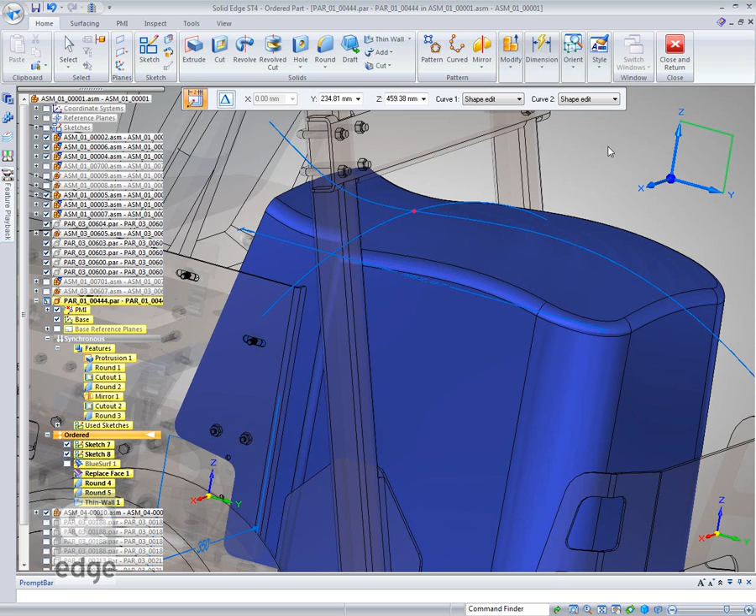Now, we also want to make some changes to the curve, to dynamically edit that. And I'm going to do a local edit here just to pull this down so that I've got a little reverse bump thing in there.

That's pretty ugly, isn't it? Who wanted that? There we go, I'll pull it up that way, pull the curve in. As you can see, I can dynamically edit from the context of the assembly, quite straightforward.

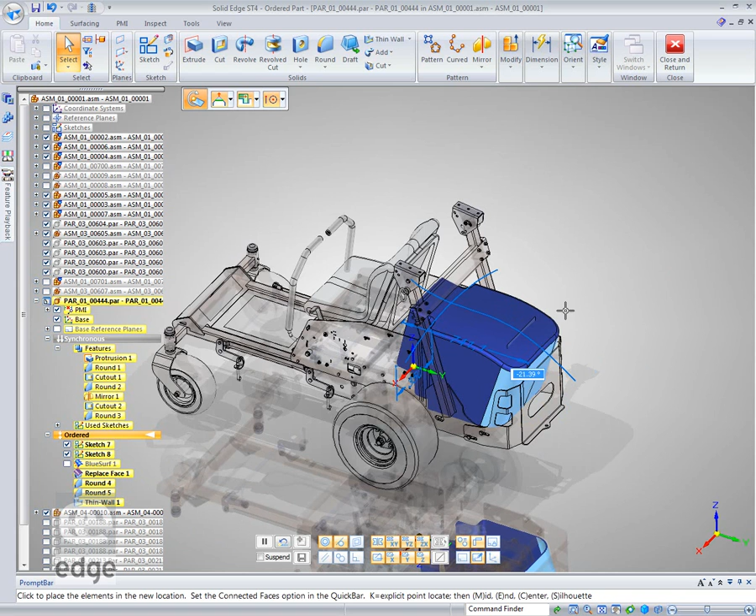Finally, one of the things I might want to do is to just do a synchronous edit to this back face here and lean that out. So I want to lean that out, say minus 18 degrees.

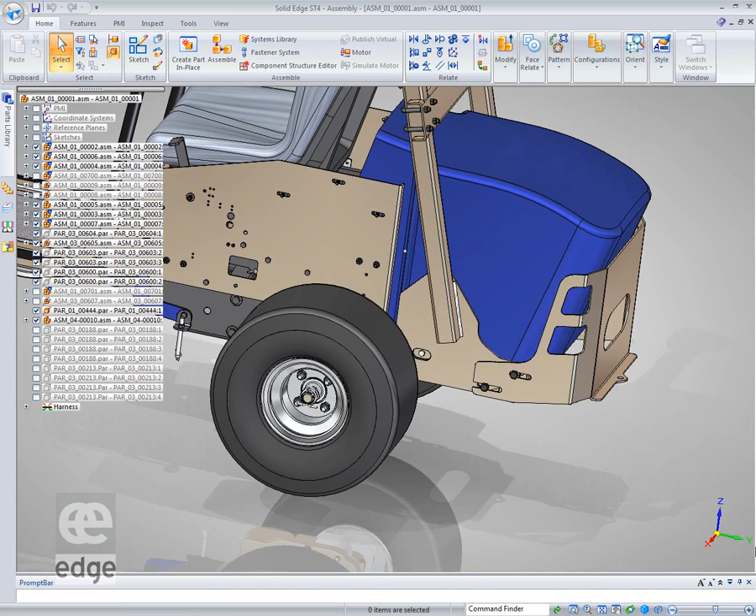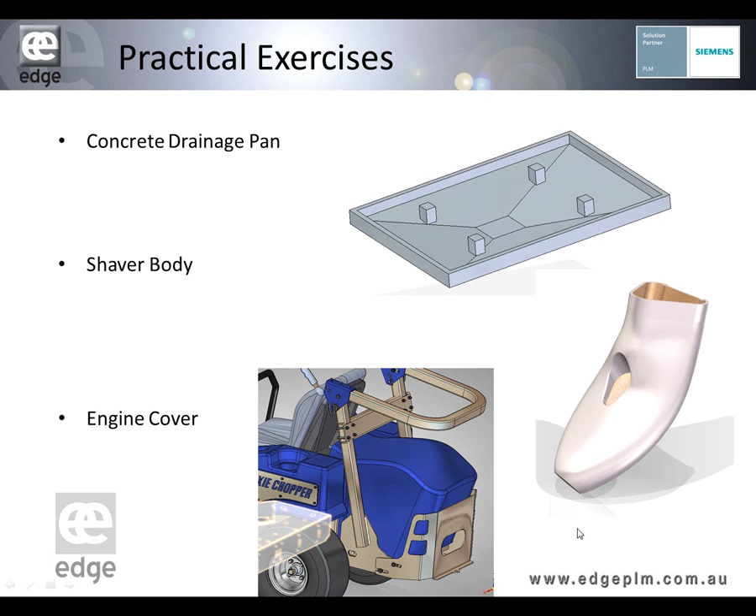And let's return to our top level assembly, and we've got our little part. So you can see editing in the context of an assembly using surfaces, everything works as expected, and we've got a lot of power. And you saw in that example that we're using both synchronous and ordered together. The surface was ordered, the rest of the thing was synchronous. We could edit the synchronous in synchronous, the ordered in ordered. We didn't really worry about where we were, what we had to do.

So in summary, just briefly, if you just work through some of these fairly simple procedures, you'll become pretty proficient in surface modeling.